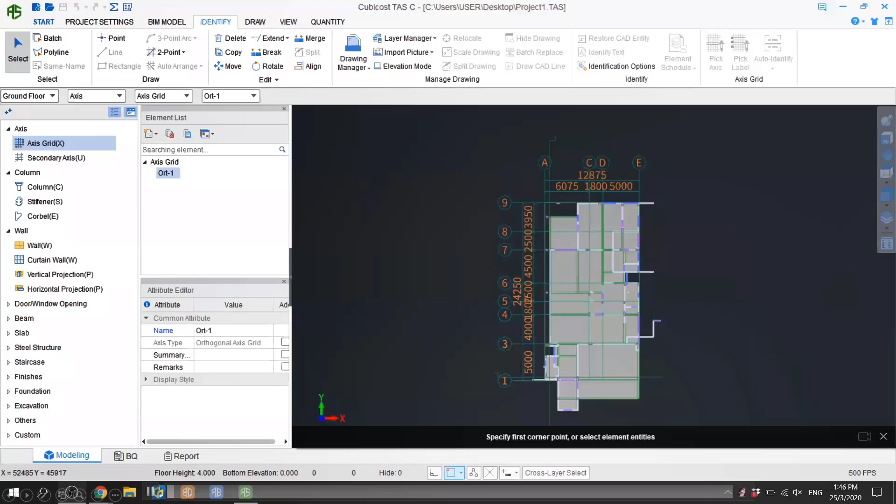All right, everybody, if you can see on your screen now, this is a project that has been completed by one of the users. The task is to complete from the foundation level up to ground floor only. So this user wishes to combine the project with other colleagues. What he needs to do is just select the required project, and then our software will read and extract all the information from the other project into this project file.

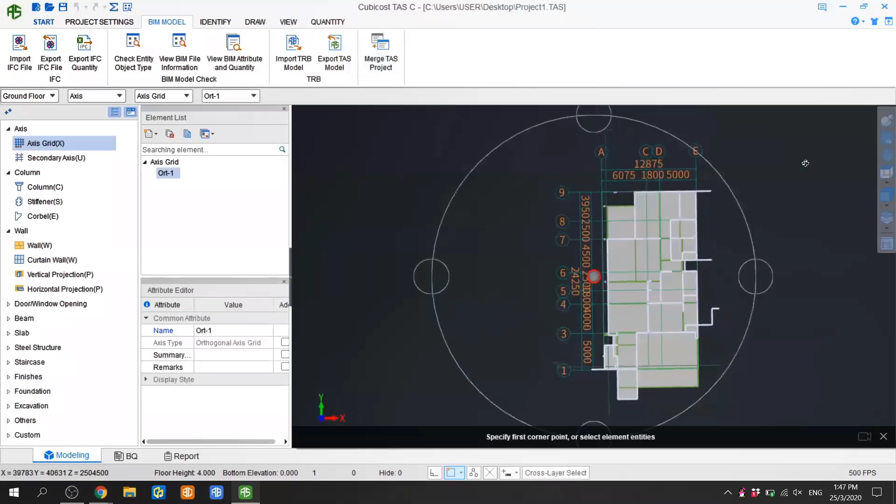Then the user just needs to select the floor and also the required elements that he wants to bring into this project file. Okay, so here is the flexibility that we provide to all of our users, where we don't set any limitation. They can easily pick any elements or any floors that they want to import. After everything has completed, they can quickly check using our 3D view function whether all the elements have been imported or not.

So as you can see, Mike, there is no problem for our users out there to do the collaboration within the same application. So this is TASC. At the beginning of this video, we can see there is only one floor, and now after merging with another project file, it becomes multi-floor. So this is the flexibility and also the collaboration function that we have inside our Cubicost TASC product.

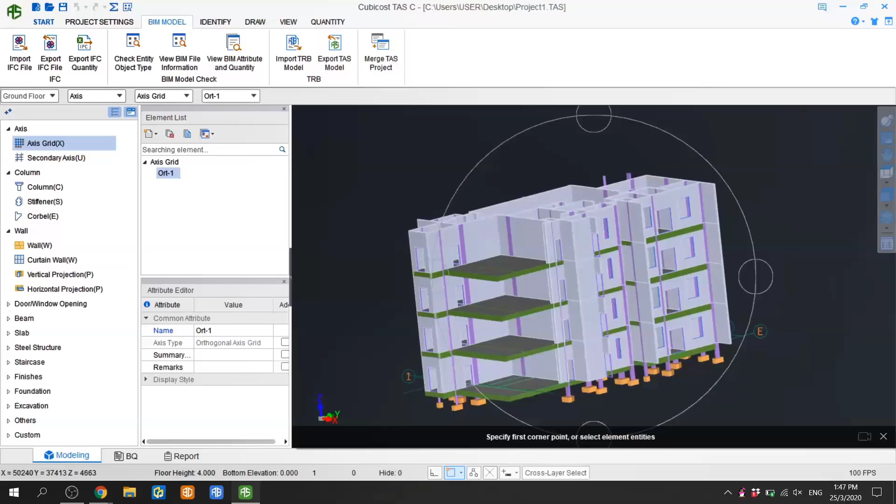That's actually very simple to merge the file and enable a better collaboration between two different QS. Correct, Mike. Okay, so now I would like to show you guys also what it looks like if they want to merge for a big scale project, a mega project. Can it be done in our software?

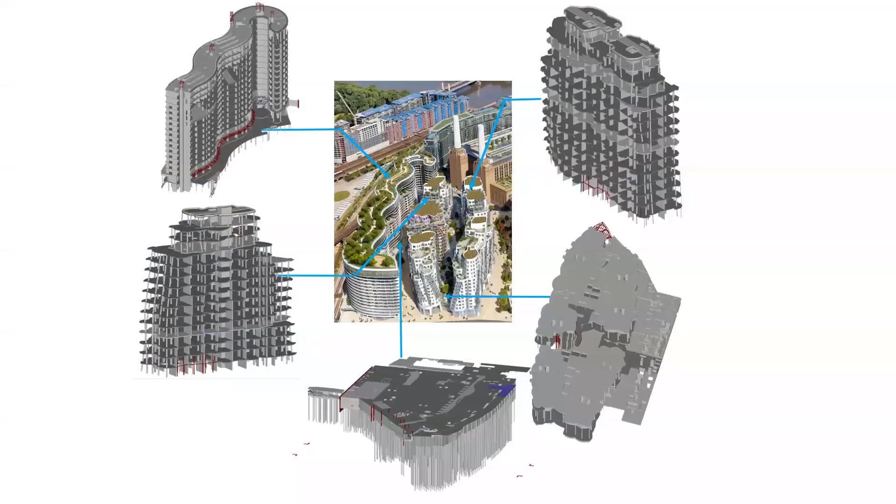So take a look at this case study from us. This is the Battersea Power Station in UK, where this project has 5 different packages that are constructed in different phases. In this project, it involves several consultants, with each consultant managing each package. So they have to measure each package model, and then later on, all these 5 models have to be merged

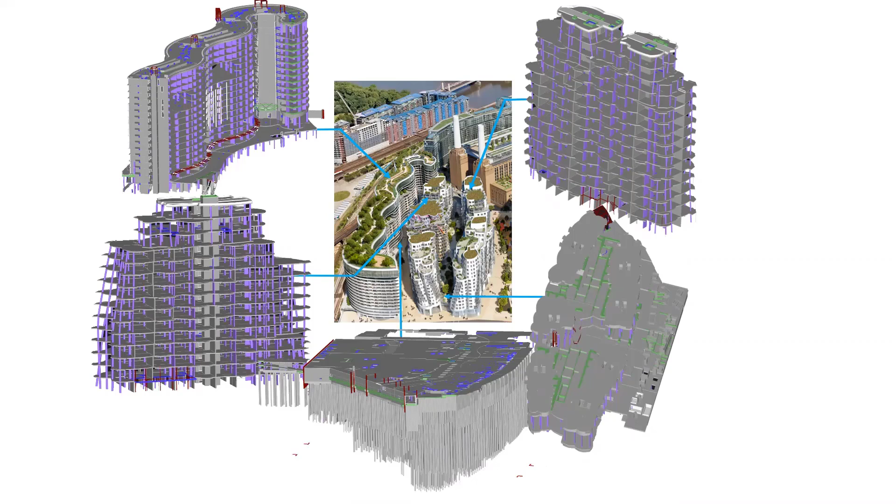into a single project. So now, as you can see on your screen, this is the merged file from the 5 models that have been combined in our TASC project file. What we want to emphasize here is that our software is able to do this collaboration regardless of the size and complexity of the project. So this is again the benefit that we provide to all of our users out there.

Wow, Jude, that was really a remarkable case study to showcase the flexibility of our products. You can see how complex this mega project is, and yet it seems very easy.

It's actually very easy to merge all these 5 different models into one, and it actually creates a wonderful 3D model to showcase the project. Yes, Mike, correct. Yeah, very good explanation indeed. I hope that our audience has gained a better insight on how to enable work collaboration between office and

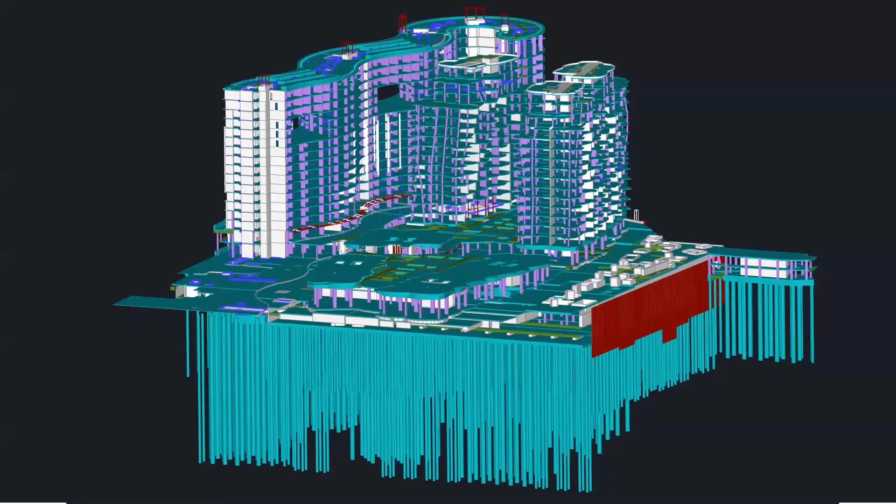also construction site. Jude, let's say QS has completed the model for structural elements first in TASC. Do they need to redo the work in TRBC in order to get the rebar measurement? Wow, Mike. Okay, this is also among our frequently asked questions. Okay, this is a very interesting question, Mike.

Actually, our products not only can merge models within the same application, like I mentioned just now, some of the floors in TAS, and maybe some elements that you want to merge inside TAS, right? But also it can merge models generated by 2 different Cubicost products. So taking example as TASC and also our TRBC.

For example, there is a scenario where our user has already completed all the TASC elements such as the masonry wall, the door and window, and also maybe some of the structural elements such as column, beam, slab, and concrete wall, perhaps. So all this model can be easily imported into our TRBC software to enable our user to continue with the rebar works.

So actually they don't have to redo the works. They can easily import the model and then reuse the same model to continue with the other works such as the rebar. All right, so this interoperability of our software is also helping them to improve the efficiency. So as you can see, our TAS can import to TRB. How about TRB to TAS? So don't worry about that.

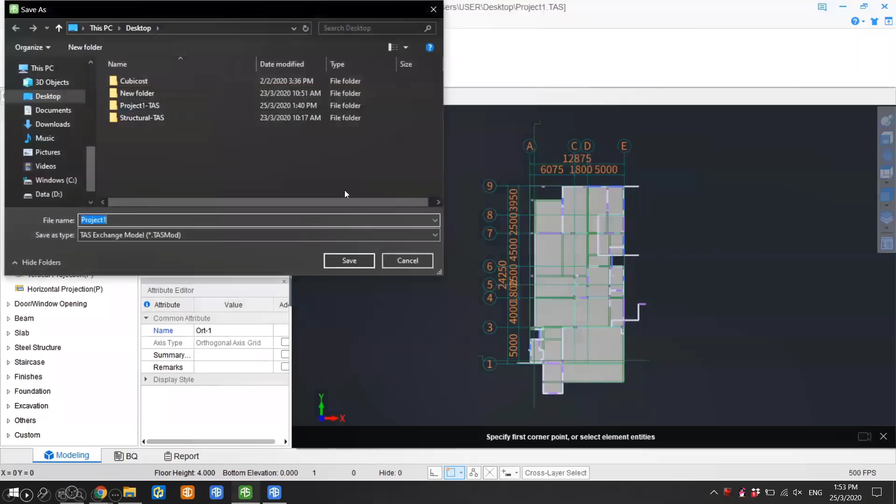All right, Mike, let's take a look at this short video that we have prepared for you to see more clearly how this process can be done inside our Cubicost software. So taking example, if the user has already done the model inside TAS, he just needs to export the TAS model and bring it over to the Cubicost TRBC project file. In this project file, he needs to import it by using import TAS model.

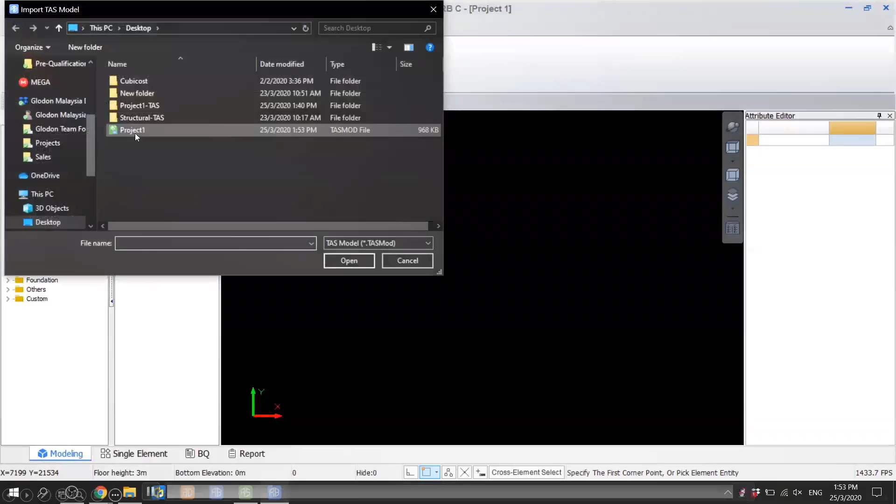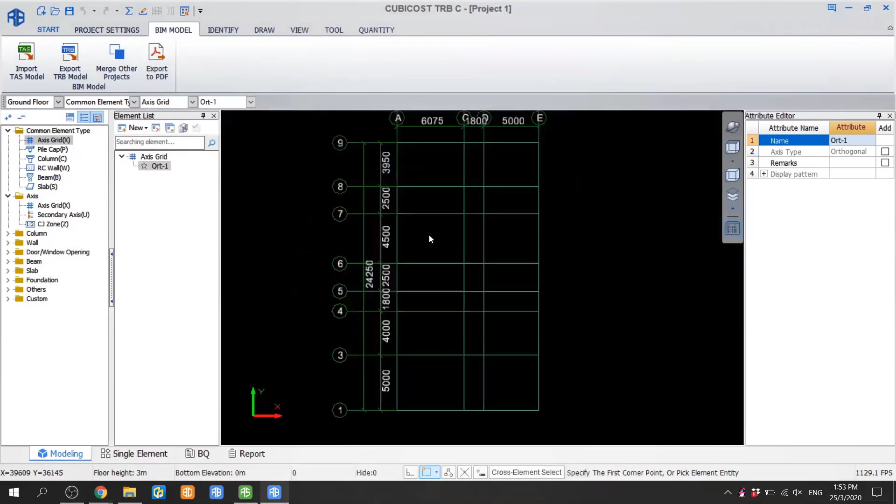Then select the required project that he wants to import inside this TRBC, then do some settings, including selecting the desired floor and elements that they want to combine with TRB. After that, they can easily check all the elements that they have already done inside TASC with the 3D view function. This helps our user to quickly check whether all the models have already been imported or not.

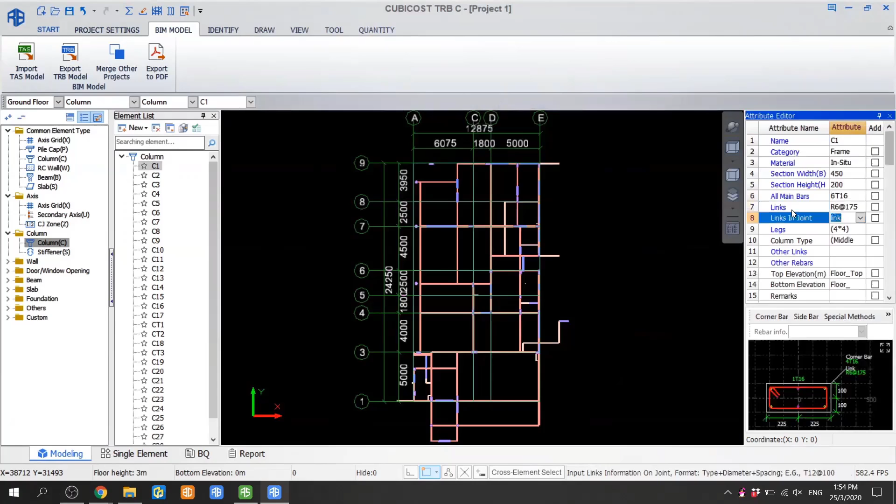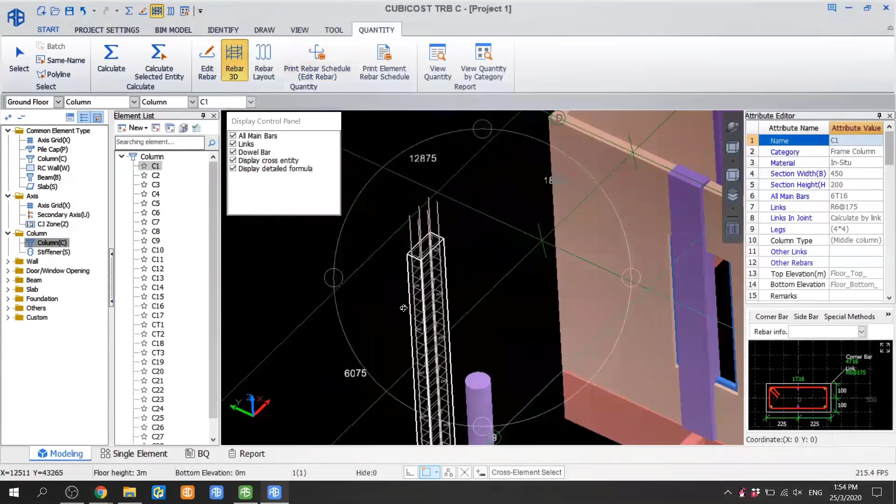And as you can see, we don't have any double work involved in this process. They can easily continue their works by inputting the reinforcement information. So in this video, the user has already filled in the information for the column element. Then the user just needs to calculate to see the results. And within a few seconds, the results will come out together with the rebar 3D display.

All right, Mike. So as you can see in this video, as I mentioned just now, there is no double work involved in this process. It means our users do not have to redo the model again if they want to do it inside TRB. So I just want to summarize again. If they have already completed the works inside one of the software, they can easily import and integrate one with another.

Yep, that is brilliant, Jude. This is really good because as far as we know, QS always do double work, right?

Yes, this is correct, Mike. This kind of interoperability between the software actually helps them to reduce double work in the entire process of the measurements. That is really good. Yes, and actually our software is aligned to the target of our business, which is to strive to help our users improve their work efficiency and also productivity.

Okay, Mike. So we have already talked quite a lot on TASC and TRBC. So now, what about TBQC? As someone that is an expert in TBQC, could you perhaps share with us a bit about how the quantity data in the TASC and TRBC model can be connected to TBQC? Sure, Jude.

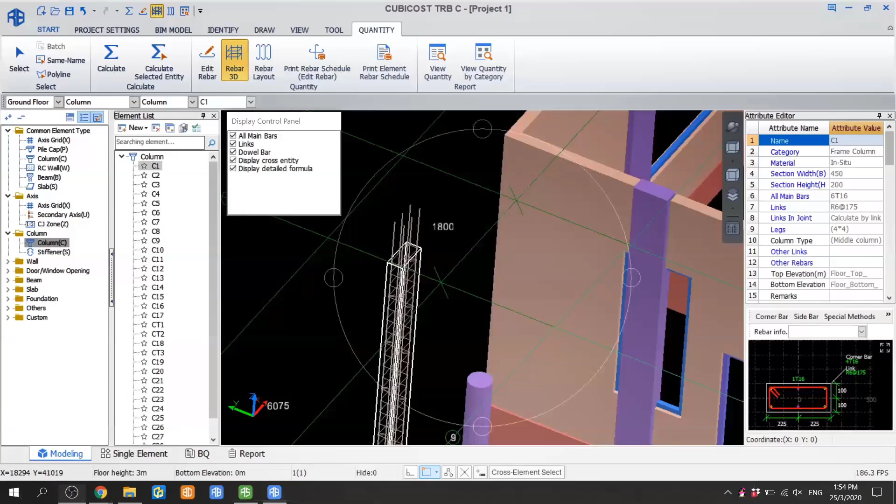As you mentioned earlier, all the Cubicost products are interoperable and interconnectable. So when you are opening your TASC model or your TRBC model, let me switch to this one, you can connect it directly to the BQ that you have prepared in TBQC earlier for your quantity linking process. As TBQC also supports collaboration, not only can you connect your model to the BQ, but your team members can also link their quantities directly to the same BQ.

After the quantities are linked to the BQ, whenever you make any changes to your model and recalculate, it will automatically update your BQ with the revised quantity. This is a very good feature because it can significantly minimize quantity errors when the model is revised. So let me show you how it works in the following video.

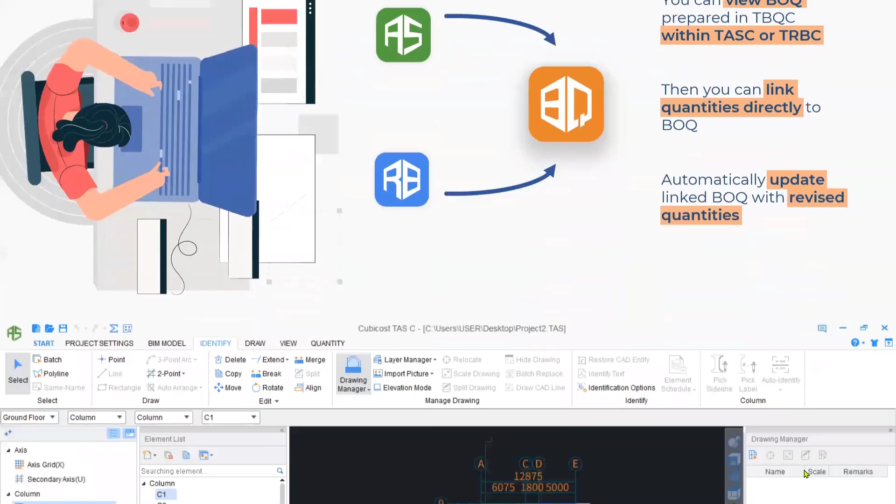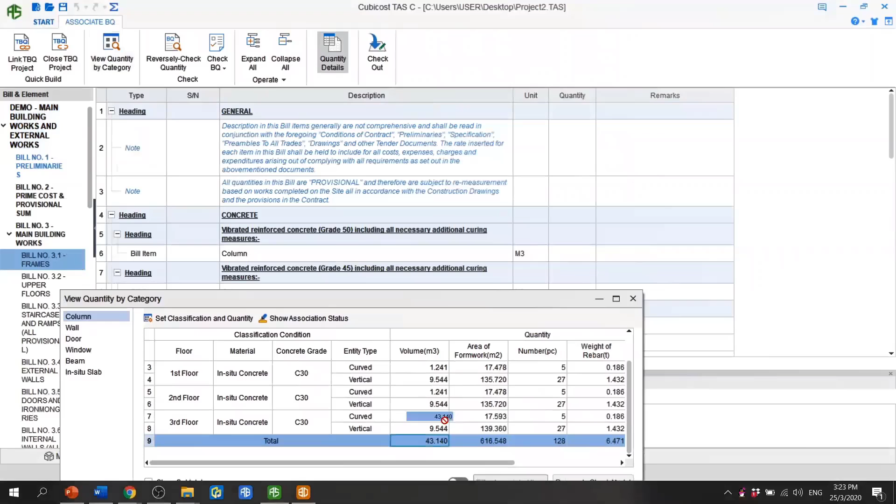As you can see here, I just need to go to the BQ module inside the TASC model and then log into my TBQC using the account and password to the TBQC server in the office. Once I've logged in, I can select the project and see the BQ directly inside the TASC interface. I just need to view my quantity by category, select the quantity that I want to link, and drag and drop it to the BQ item like this. Very simple.

After I've linked all the quantities to the BQ item, I can always come back to track my linked quantity by clicking the quantity details button, which opens a quantity details panel at the bottom of the page. From this panel, you can see for the selected BQ item which element and which floor the quantities are linked from, and the quantity details are also listed. So the team leader or whoever can track the linked quantity and make changes anytime.

If they find that certain quantities are linked wrongly, they can come back to the quantity details and remove whatever is not relevant to this particular BQ item. Very simple. And as I mentioned, when you recalculate the model after tweaking it, the linked quantity will automatically be updated inside the BQ. Very simple and intuitive, so you will minimize a lot of the errors that come from linking manually in an Excel file.

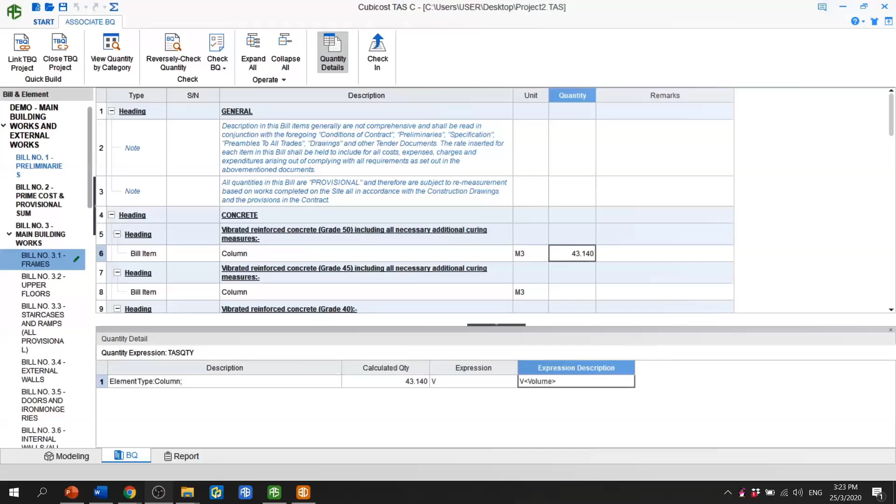Yep. Wow, that's really cool, Mike. Needless to say, users can link quantities easily now, and it saves lots of time compared to manual linking. Yes. Okay, Mike, we can remote work with TAS C and TRBC, we understand that already. But what about TBQC? Can users remote work with TBQC as well?

Yes, Drew, it is workable. I just need to explain a bit about how TBQC works. TBQC is a server-based software, so all the files are stored in a main server. Users need to log into this server in order to access the project files they have done inside TBQC. So let's say the main server is in the office.

So if a user is working at home, he or she needs to get permission from the IT administrator in order to connect to the office VPN. VPN stands for virtual private network. Once the user is connected to the VPN, they can use TBQC as usual, as if they are in the office network. Okay, so this is one method to use TBQC remotely from home.

And then we also have another alternative method. Users can install a remote work application, such as TeamViewer or UltraViewer, on both their office and home computers, and then they can use this app to remotely control their office workstation to continue using TBQC from home. So those are the two methods that we would suggest for users to remotely work with TBQC.